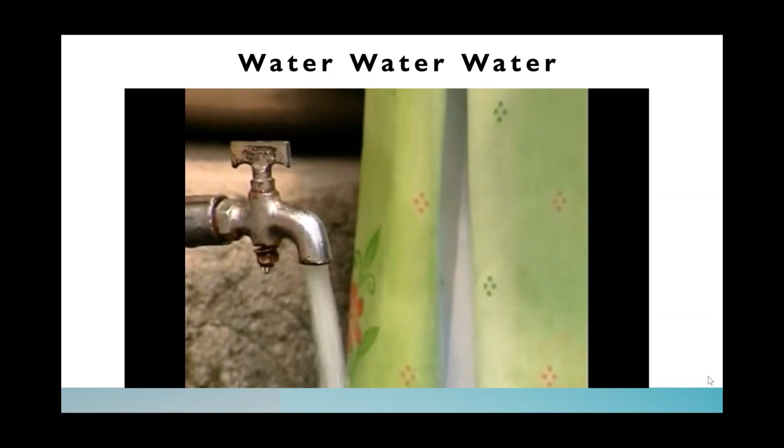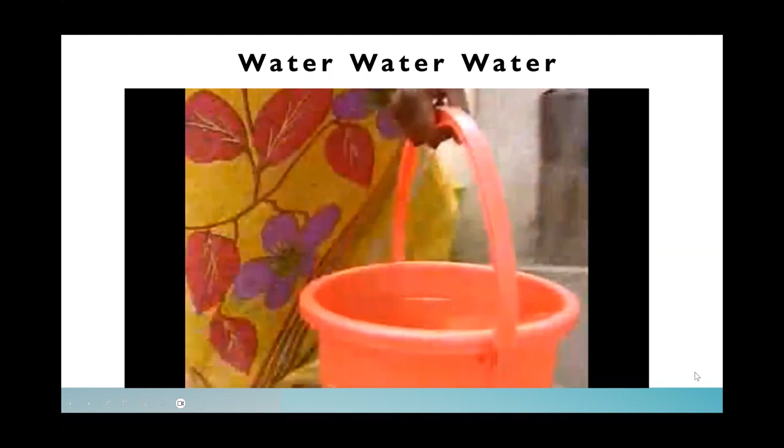Urban water supply and how PPP is a workable option. Water 24/7 is a necessity as we need water for almost all the activities we undertake in our day to day life. Over the years, continuous water supply, especially in urban areas, has become an exception rather than a rule. Even where there are no water shortages, the distribution system is such that urban residents get intermittent water supply.

Just to set up the context, I have reviewed the water availability in 7 cities around the world. While New York City and Tokyo boast of a reliable supply with very high standards and advanced infrastructure delivering multiple billions of gallons of water daily, the same is not the case with cities in emerging economies.

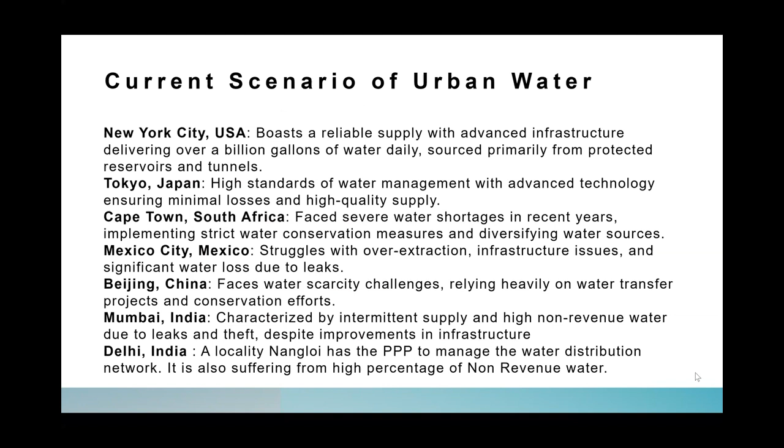Cape Town in South Africa is facing severe water shortages and has had to implement strict water conservation measures. Mexico is also struggling with over extraction and infrastructure issues. Beijing in China is facing scarcity challenges, relying heavily on water transfer projects. Mumbai and Delhi in India are characterized by intermittent supply and high non revenue water due to leaks and thefts.

Two-thirds of the world contains water, however only 1% of that is drinkable. The Indian problem is peculiar, and I feel it is more pronounced than in any other country in the world.

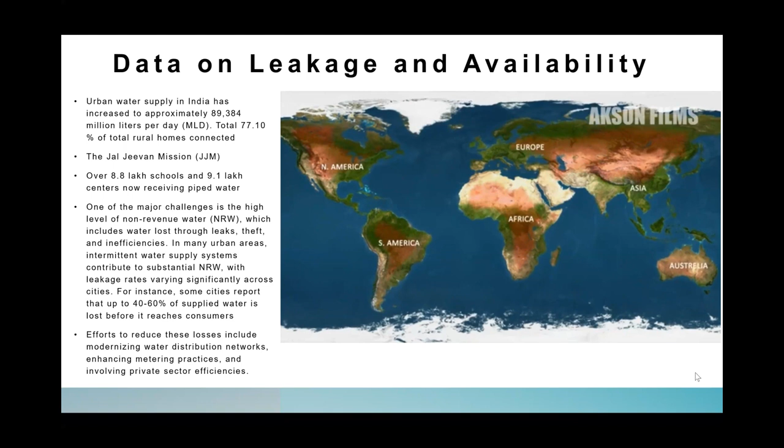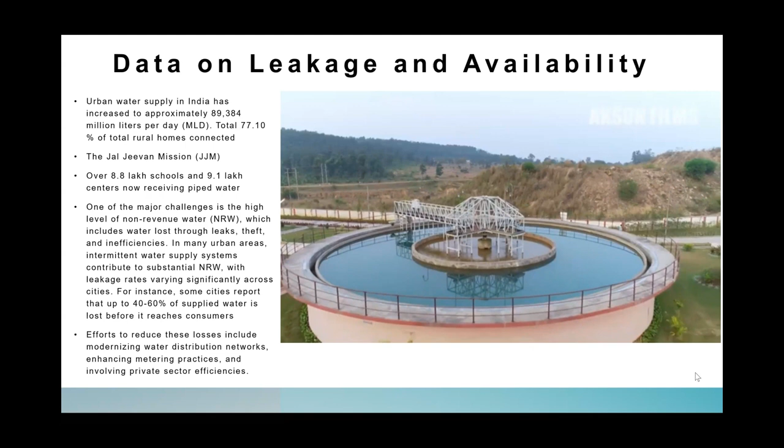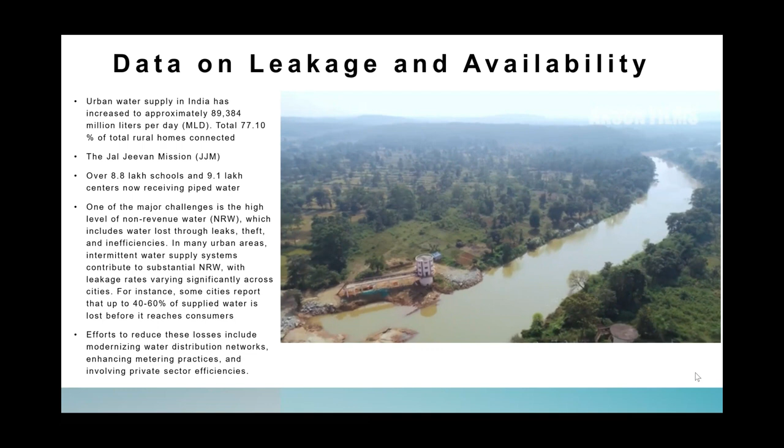While urban water supply has increased by almost 15 to 20% in the last 10 years, about 77% of rural households now stand covered. That is due to the Jal Jeevan mission of the government, which is doing a good job.

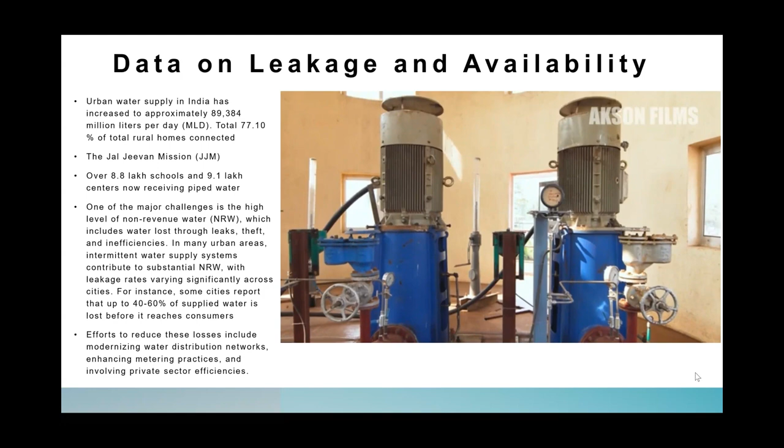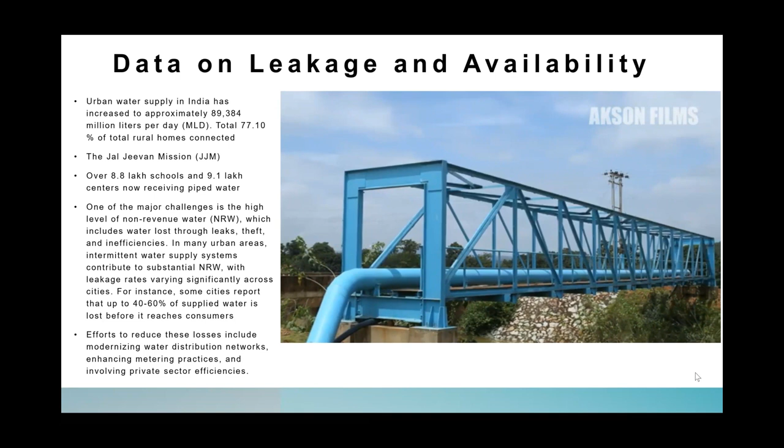Over 8.8 lakh, that is almost a million, schools and a million community centers have now been connected to piped water supply. But the major challenge remains non revenue water, which is nothing but the water lost in leakages and thefts.

For instance, some cities report as much as 40 to 60% of water being lost in leakages or due to thefts, for various reasons.

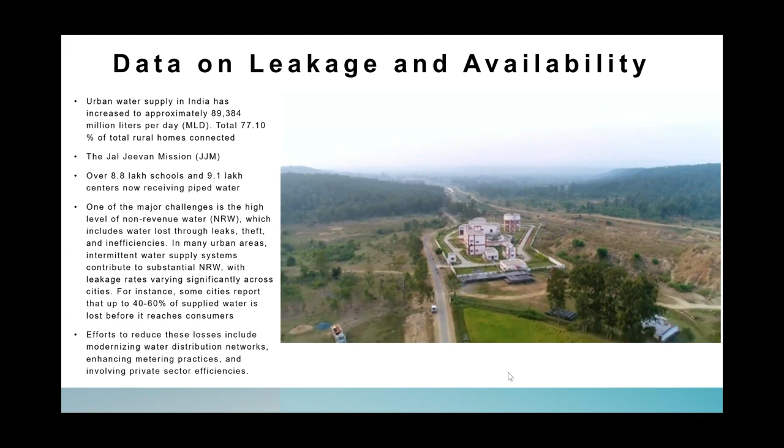Modernizing the water distribution network is one solution, along with metering, but taking care of the inefficiency and lack of maintenance of water infrastructure is most important.

You would not be surprised to note that inefficient and corrupt officials many a times enjoy political patronage. In fact, many of them treat it as their fiefdom, for which they can go to any extent to protect their own vested interests.

Water supply is also one of the most common freebies generously doled out by politicians before or after elections, and many of these inefficiencies or thefts of water are happening under political patronage. If hundreds of millions of dollars have to be earned due to water scarcity, then why should they let it go?

The public private partnership format can be of help to address the infrastructure, delivery, and managerial issues. But to get rid of thefts, a responsive law and order support is very much needed.

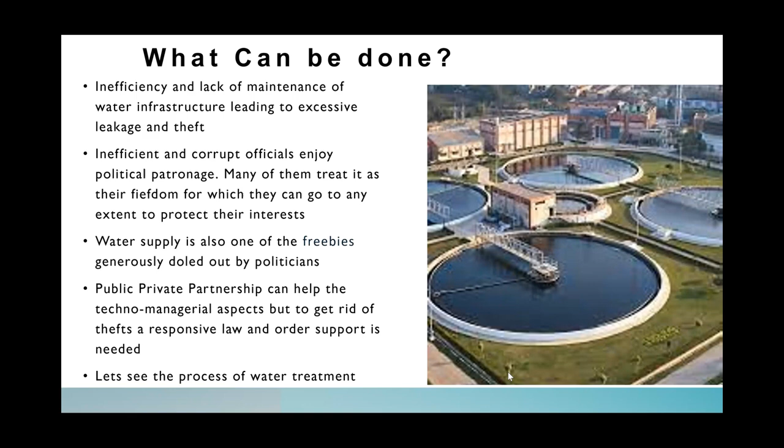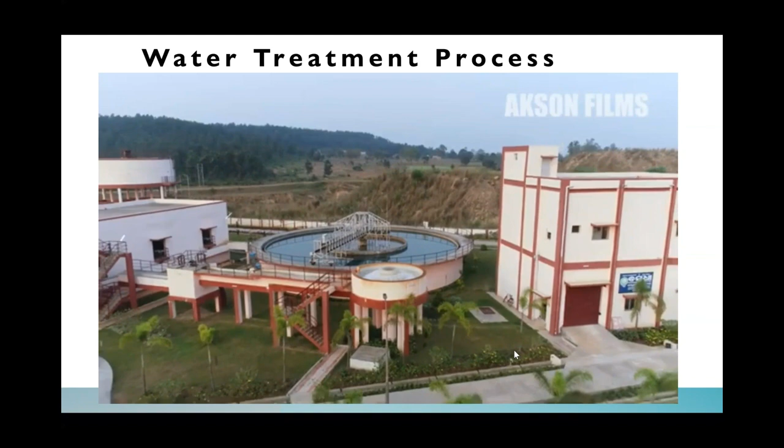Now, before we proceed further, let me acquaint you with how water treatment is done. A conventional water treatment plant of 12.5 MLD capacity has been constructed as per the CPHEEO manual to treat raw water into clear and clean potable drinking water.

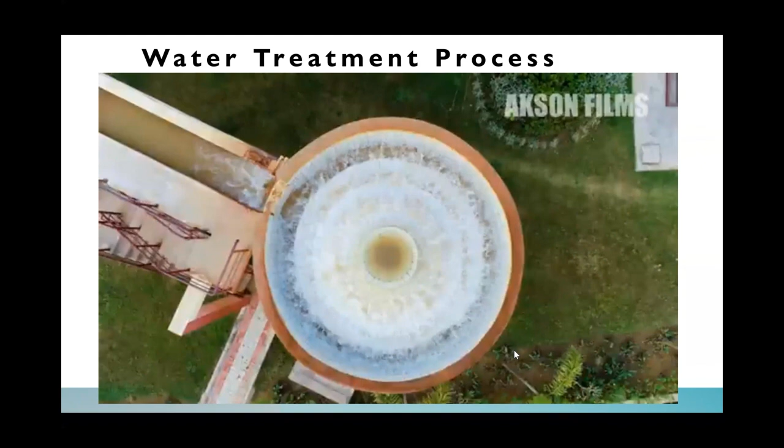The treatment process is classified into aeration, flocculation, sedimentation, filtration, and disinfection.

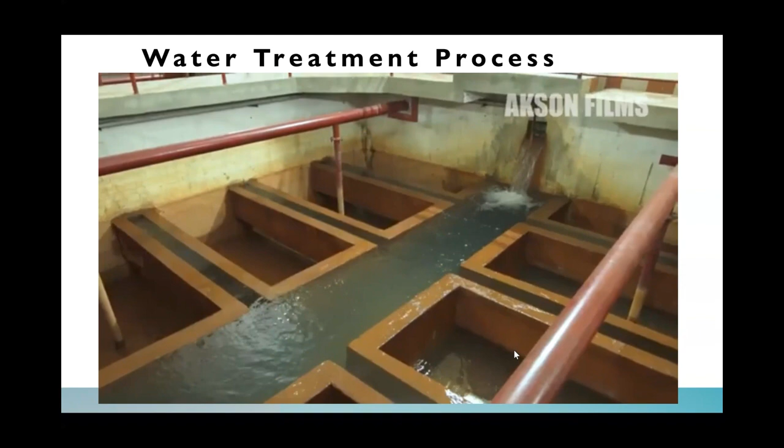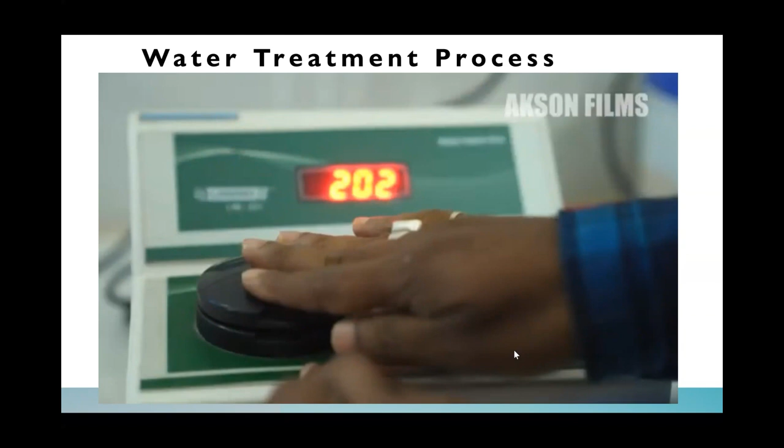On a daily basis, the quality of clear water is checked and examined with a detailed process in the plant's own laboratory constructed in the WTP. This includes examining the level of chloride, turbidity, alkalinity, hardness, dissolved oxygen, conductivity, and pH value. Moreover, a jar test is conducted, which determines the use of chemicals to be added to the raw water.

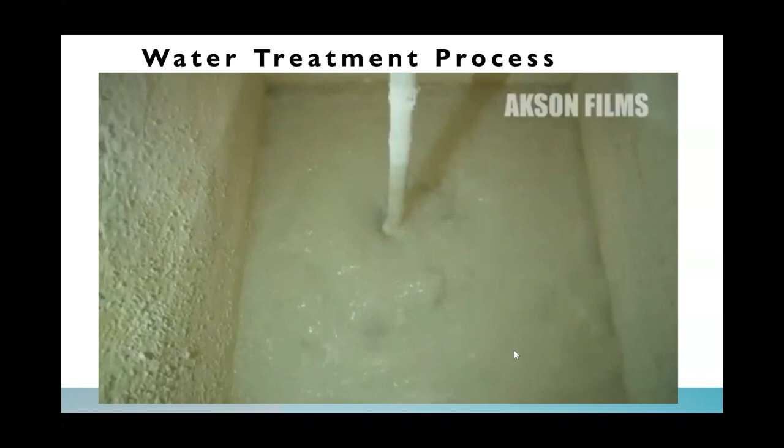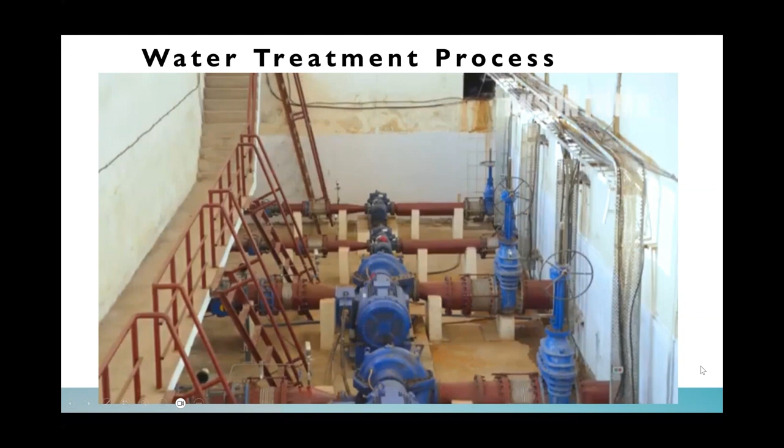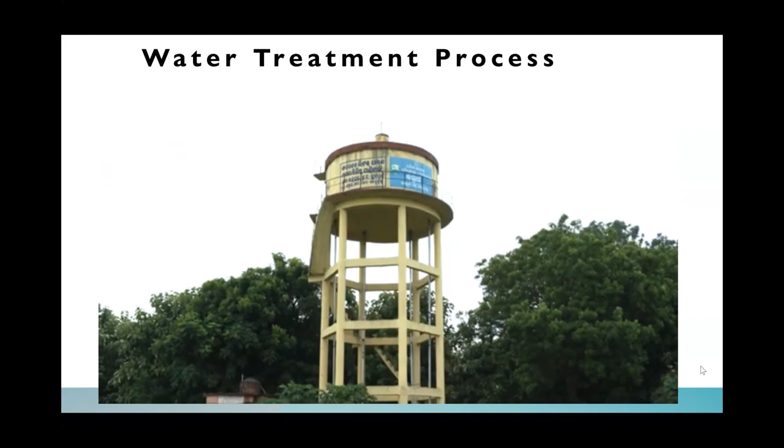Finally, pure water is collected and stored in a clear water reservoir. The clear water is pumped with the help of two horizontal split case pumps of 350 HP capacity, to six newly constructed elevated service reservoirs and 10 existing elevated service reservoirs.

Now, when we look at any urban water supply improvement, there are primarily four stages. First and foremost, a detailed assessment study needs to be undertaken. Those of the executive engineers who are viewing this can look at it more intensely. They have to undertake water audits, leakage study, and consumer survey. For all the problem areas noticed, we need to work out an alternative study so that we appreciate the alternatives and optimize the solutions.

Thereafter, a cost benefit study is undertaken to establish whether the infrastructure to be developed will be better through the departmental process, or if public private partnership is taken recourse to, whether it will deliver better results. Then a detailed project report is prepared wherein every component of the work is measured and the scope frozen. Costing is done, estimates are prepared, designs are prepared. Thereafter, if PPP has been decided as one of the formats for developing this, then a procurement could be done for that.

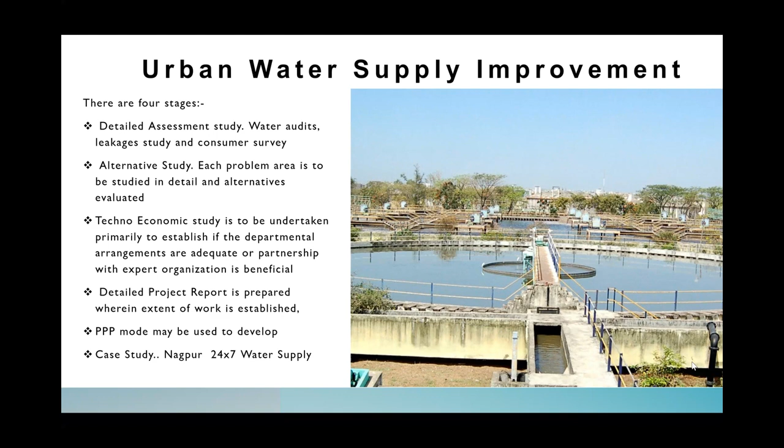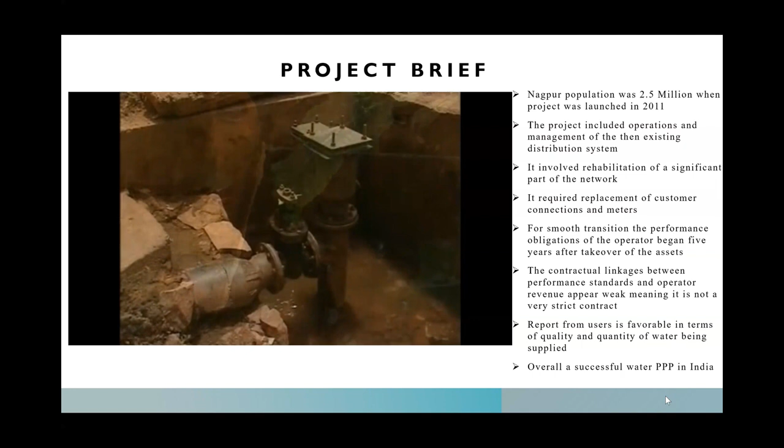Basically, when Nagpur decided to go for water supply improvement, the city had a population of about 2.5 million in 2011. Initially, it included operation and management of the existing distribution system and rehabilitation, and a significant part of the network improvement was also included. There was also a need to replace customer connections and meters, and for smooth transition, the performance obligation of the operator began 5 years after the takeover of assets, to give him enough room for doing up things.

The report from users today is favorable in terms of quality and quantity. You would be happy to know that more than 20% are getting 24/7 water supply, whereas almost half the population is getting 18 to 24 hours of water supply with good quality, and others are also getting more than 12 hours of water supply.

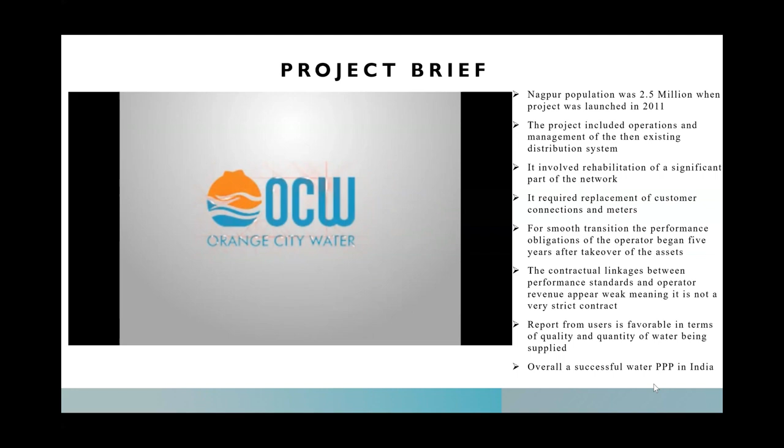This particular project is basically out of the pioneering efforts in privatizing water supply by Nagpur Municipal Corporation as early as the year 2000. The water supply function in Nagpur enjoyed a relatively higher level of autonomy compared to other cities, and due to their strong technical capability, they launched a pilot project which was a precursor to a successful full-fledged PPP project. Initially, they targeted 10% of the household connections and they succeeded.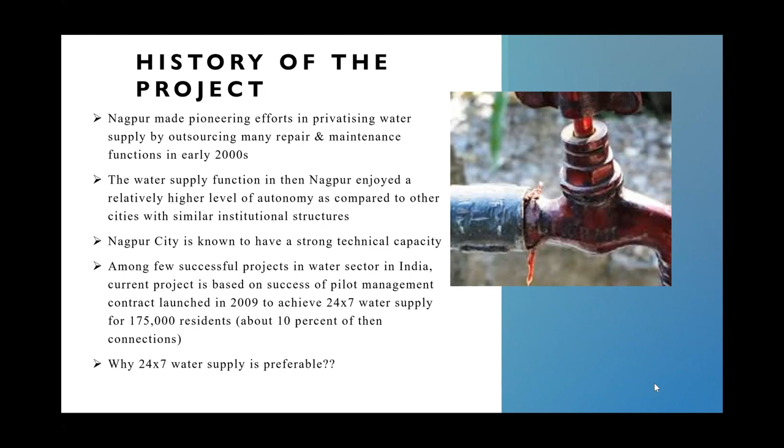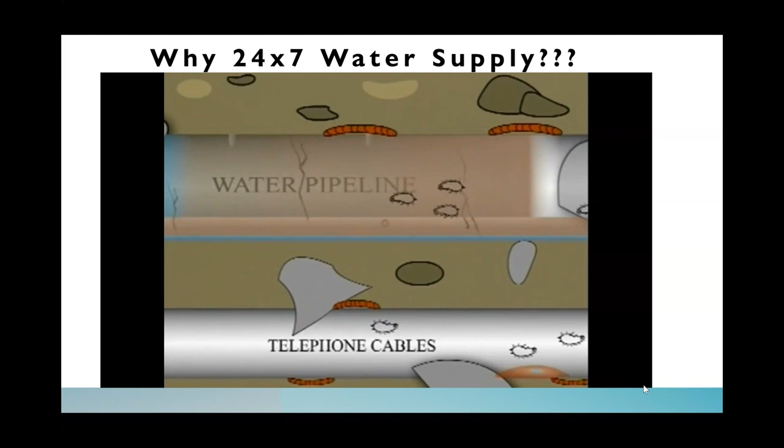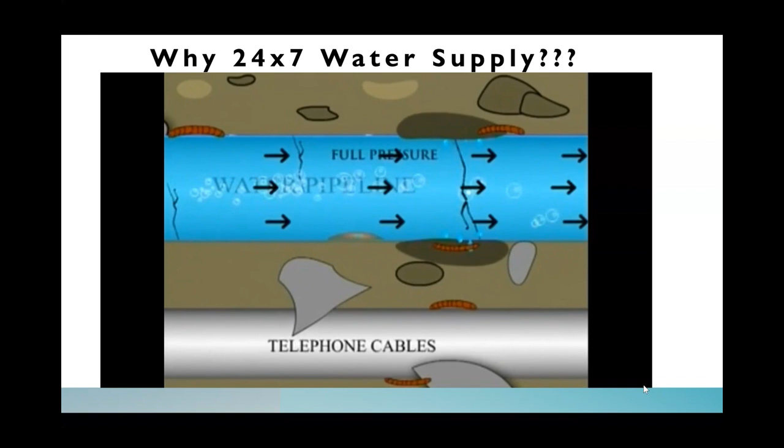Now, I have been talking about 24/7. Why is 24/7 water supply preferable? It's not a fashion statement, but is essential to prevent waterborne diseases. When the pipes are empty, bacteria and pollutants enter the leaking pipes. When the pipes fill up again, the water now distributed is contaminated. Therefore, the water supply pipes have to be continuously pressurized, failing which people could be affected by waterborne diseases like gastroenteritis, typhoid, diarrhea, and jaundice.

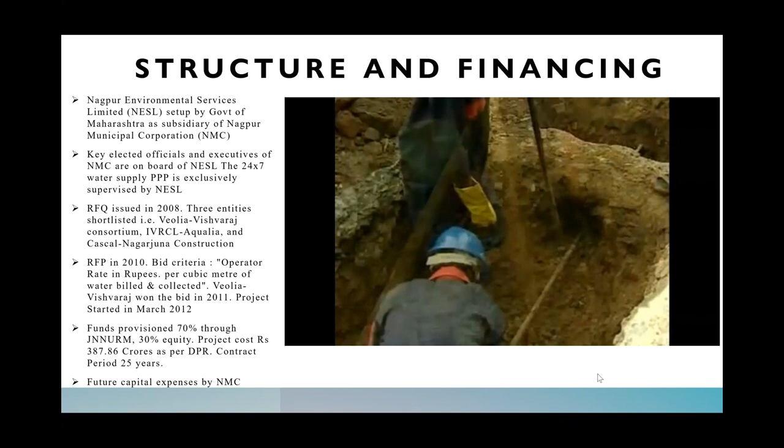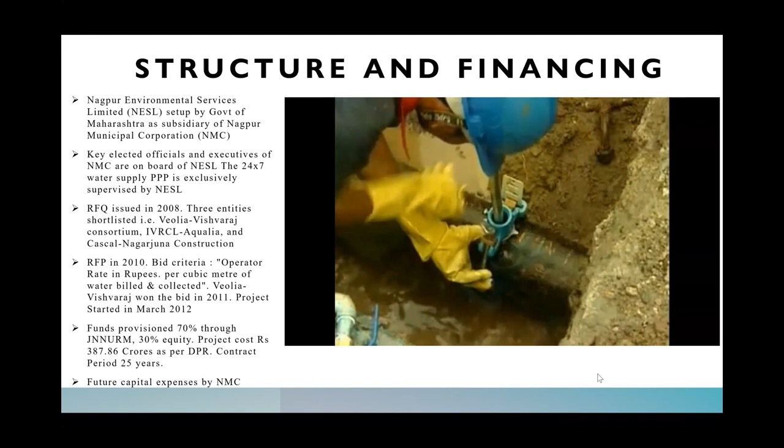When we talk of structure and financing of this project, the good thing which happened was the government set up Nagpur Environmental Services Limited, a special purpose company, and all the water value chain assets were transferred to this special purpose company. Key elected officials and executives of the municipal corporation were on the board of this company, and it was mandated to undertake public-private partnership.

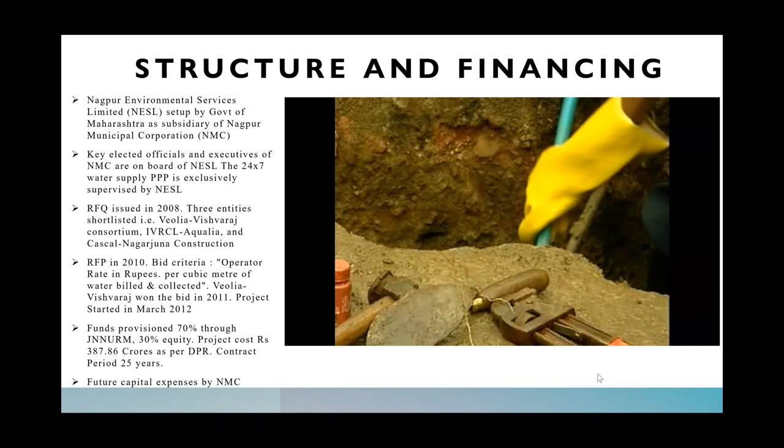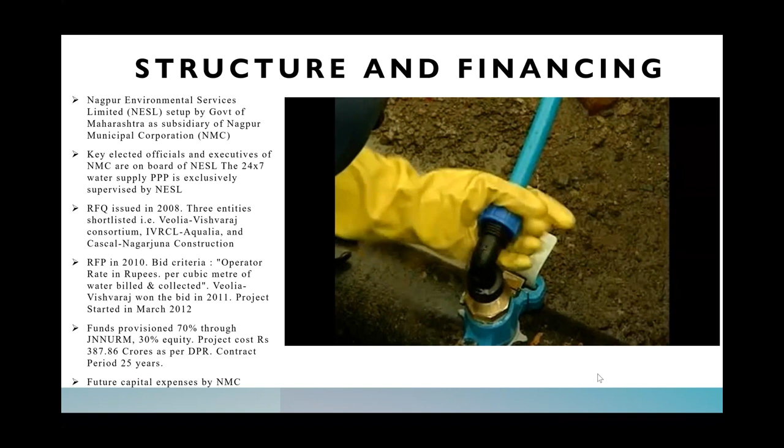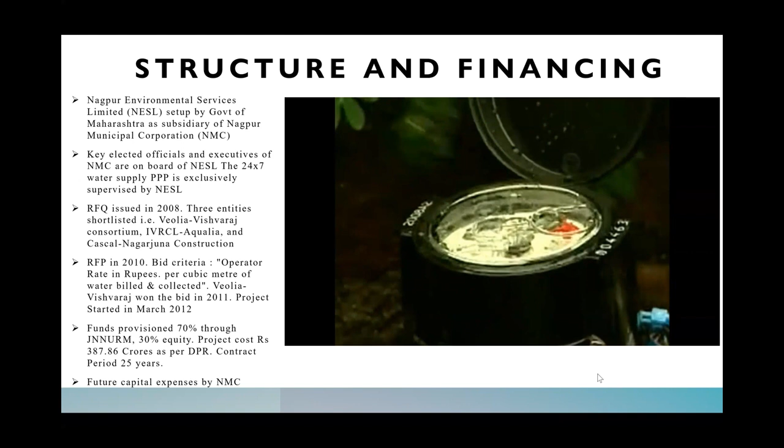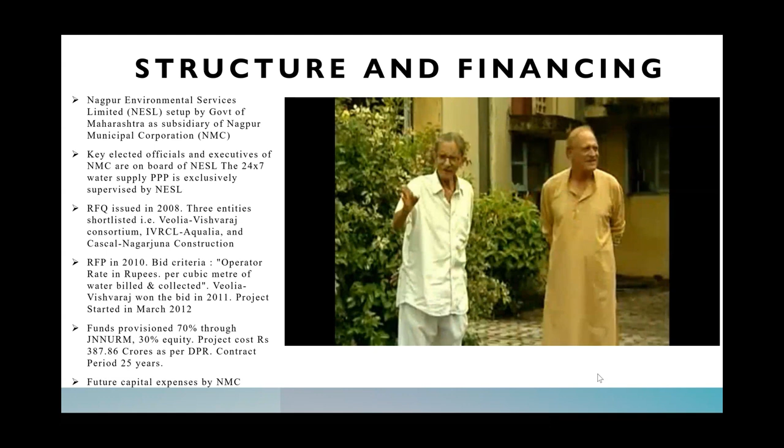There were three companies who responded to the RFQ, all with famous names: Veolia, Aqualia, and Cascal, with local partners. In 2010, the RFP was issued, and the bid criteria was operator rate in rupees per cubic meter of water billed and collected. So it had no relation with the tariff the user is going to pay. The project was finally started in 2012.

Another good part of this project was that 70% of the project cost was provisioned through Jawaharlal Nehru Urban Renewal Mission, a funding mechanism for improvement of infrastructure of urban local bodies in India, and 30% equity was brought in by the promoters. Project cost was almost $80 million at those conversion rates, and the concession period was 25 years. It was decided that future capital expenses will be undertaken and borne by the Nagpur Municipal Corporation.

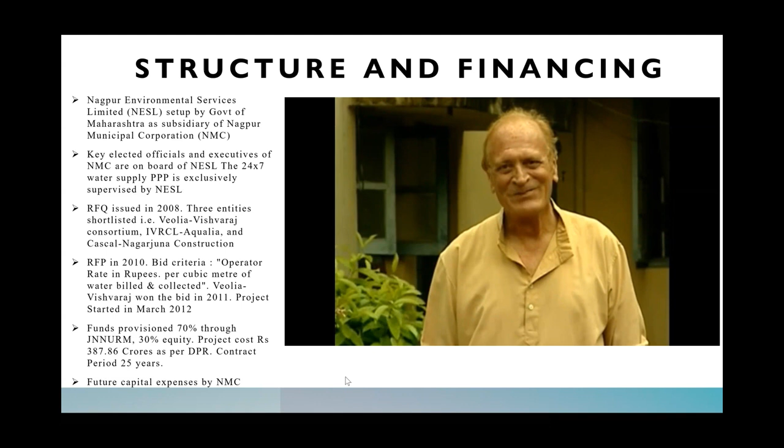Now, there are various risks in any project, and so were there in this project. However, the land risk was not there, as most of the land was already with the Nagpur Municipal Corporation. The most important thing was social risk, which was well managed by having a pilot project and keeping the target population regularly informed and assured that the quality and quantity is going to be improved, not increased in cost.

Financial risk was minimized with 70% of the project cost coming from JNNURM, and revenue risk was minimized by having an escrow account which had all the collections from households or commercial areas, paying for raw water, electricity, and the operator. The shortfall in this escrow account was met from the general budget of Nagpur Municipal Corporation.

The design, construction, operation, and handover risks were assumed by the private party, Orange City Water Limited, which is the special company of the Veolia-Vishvaraj joint venture. Early termination, if it happened, was to be the responsibility of Nagpur Municipal Corporation.

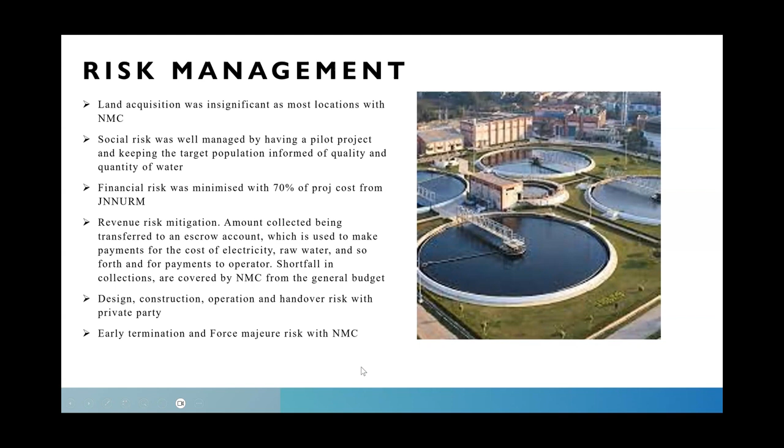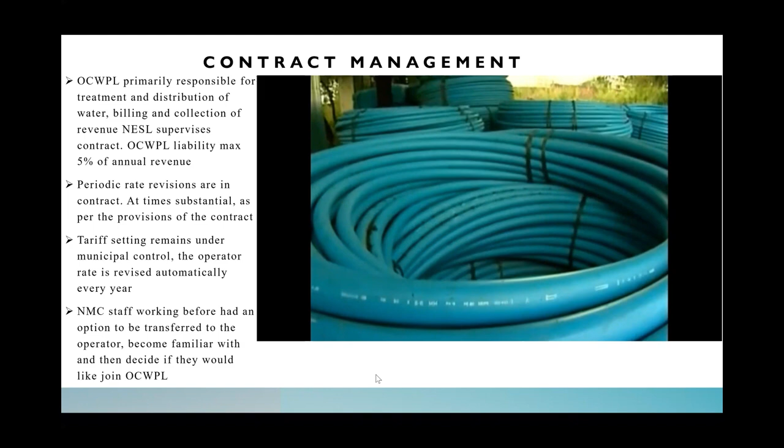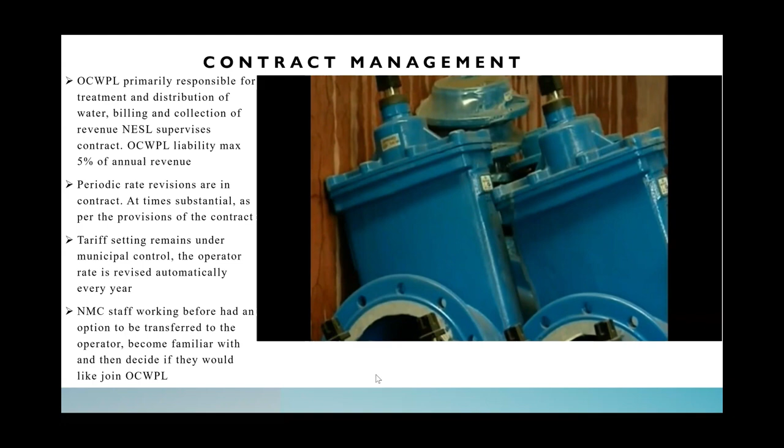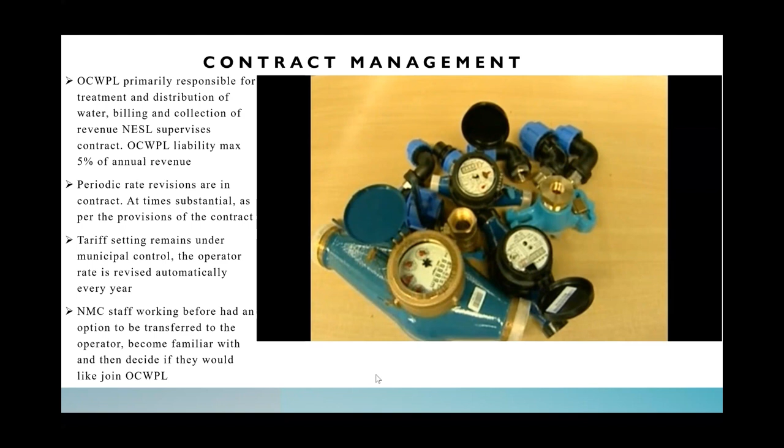OCWPL is a special purpose company created by the joint venture of Veolia-Vishvaraj, and their maximum liability was 5% of their annual revenue. Periodic rate revisions were provided separately for the contractor in the contract, whereas the tariff revision was totally at the discretion of Nagpur Municipal Corporation.

Another feature of this contract was that NMC staff working earlier in the water supply department had the option to be transferred to the operator, become familiar with them, and then decide if they would like to join this new company, or vice versa. OCWPL would also judge their competence and decide whether to keep them or release them.

There are many lessons which emerge from this successful project. Firstly, for water supply PPP, holistic planning is required, right from water audit to social impact assessment. And we must appreciate that PPPs are not the solution to everything. They are at best to be used as strategic levers to enhance performance and fix other elements.

Institutional structure on the public side is important. Creation of NESL, that is Nagpur Environmental Services Limited, proved efficient and specific to manage this contract. And provisioning for tariff rebasing brings flexibility for such a long-term 25 year contract.

Such long-term, politically sensitive, socially important projects need a lot of maturity, and that was duly displayed by the board of Nagpur Environmental Services Limited and Nagpur Municipal Corporation. I recommend that other municipalities refer to this before launching their own PPPs.

And I am not the only one talking about the success. Let's see what users have said.

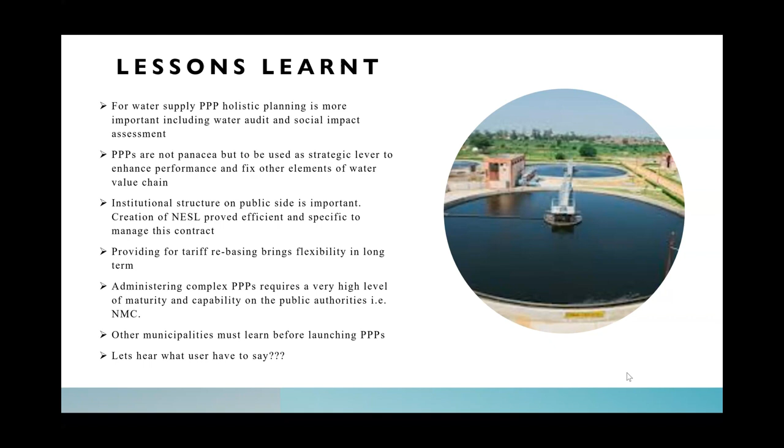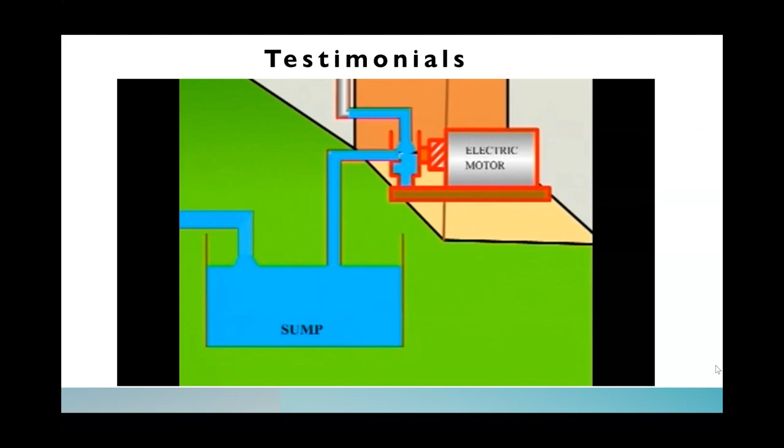Not only are the residents of these areas getting water 24/7, but also at high pressure. An additional benefit of continuous pressurized water supply is that people need not store water in sumps and then use electric pumps to fill their rooftop tanks, resulting in savings on electricity bills and conservation of energy.

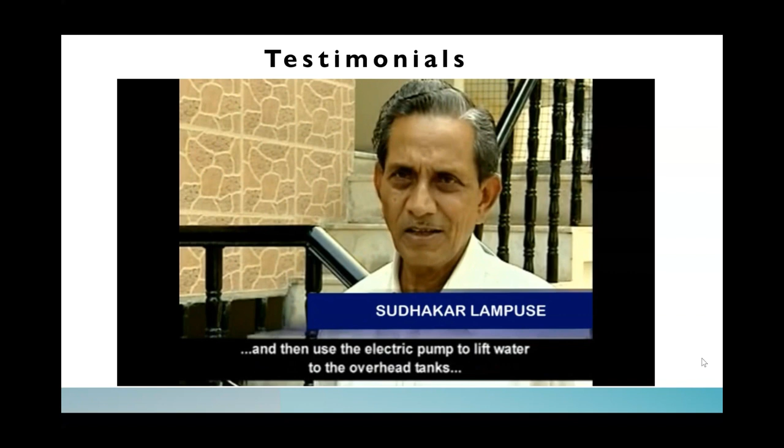That's the media from where I've taken references.